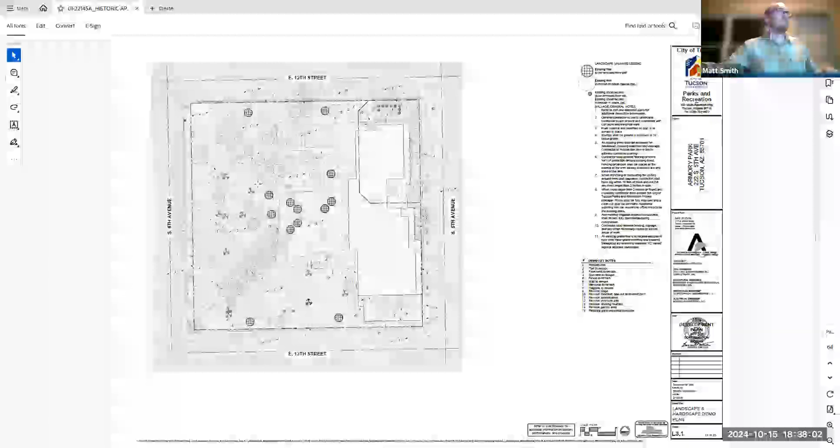This is Helen. Are you able to make your screen larger? Yep, that work? Thank you. I'll just pan around. Much better.

As far as the hardscape elements, we're proposing removing the existing shuffleboards, horseshoes, games court, removing the existing plaza space, and removing the existing stage with overhead structure. The drive entrances into the site with the vehicle barricades will be removed as well. Up in this area, we are working around the one saguaro that will remain, removing some of the curbs, some of the DG areas, and adding parking where budget allows.

Moving on to the plan, I'll start north and work down. In the footprint of the existing games area, we are proposing to add a dog park. The dog park works around an existing underground water line that needs access by Tucson Water. It's been a sticking point with this project, so we're proposing the gates all aligned along this water line. I'll go into the details of the fence and the gates further down.

Going to the center of the site, we are trying to bring back the historic character and context of the site, moving the stage back to the center, trying to realign some of the crossing paths and bring the focus to the center of the site.

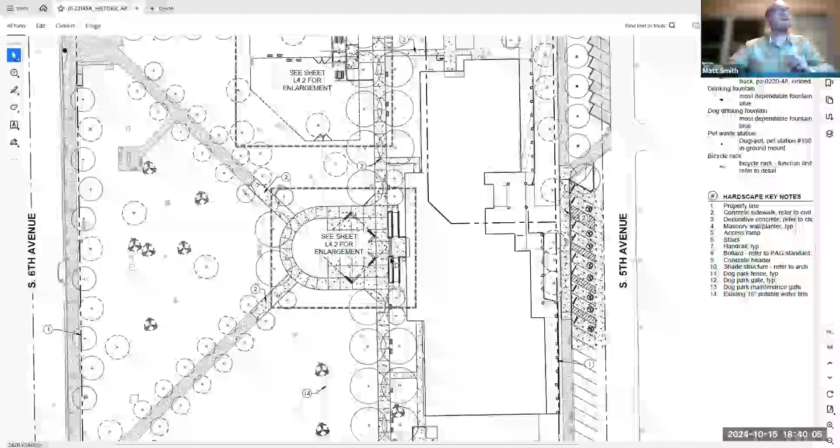Going towards the activity center, we are proposing some steps and ramps to get access into the back entry for the center, and that all aligns with a north-south sidewalk for circulation. That sidewalk would be lined with Chinese pistache, trying to mimic some of the historic ash trees along the perimeter of the site.

It appears that walkway has been moved maybe 10 or 12 feet to the west from the original proposal we saw in January. Is that to accommodate the new ramps? It may have been moved just a few feet, but it's more or less stayed in the same location.

Some of the constraints we're working around are the existing pole off the corner of the building, and then trying to align as best we can without removing many parking spaces.

So the idea is to limit vehicular circulation into the site. This north-south path is about 10 feet wide, so it will accommodate trucks and other access into the stage, but then would have a barricade to limit access at any other times.

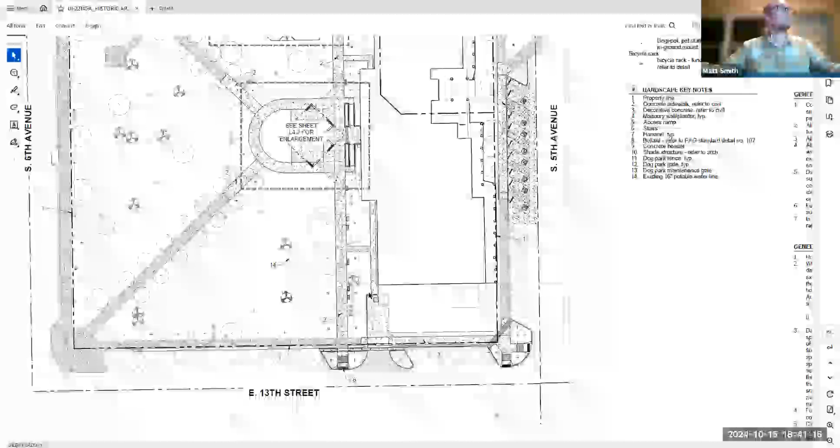Down where the existing dumpster is, we're proposing moving glass recycling, so all that is concentrated in one area. And then moving around the perimeter of the site, as I mentioned, we are proposing staff parking, and this will be only staff parking.

And then adding back trees to the perimeter of the site. Over here would be ironwoods around the staff parking, kind of mimicking the desert theme with the saguaros and palo verdes that are already here. And then around East 12th, 6th, and 13th, we would be putting back ash to mimic the historical ash.

So there's a couple questions to the board with these trees, particularly the cypress that blew down and the ash. Is that the path we should go back down? Is replacing the cypress with cypress, replacing the ash with ash, or is there a more long-term solution?

We have concerns with the emerald ash borer eventually getting all ash in Arizona, maybe in the 15 to 20 year time span, but we're looking for a 100 year time span. Are we better off putting oak or something else? Same with the cypress—are we trying to match what was there, or do we want to start bringing something back in?

Helen's probably best suited to address this, but I've got some comments too. Do you want to go first, Helen?

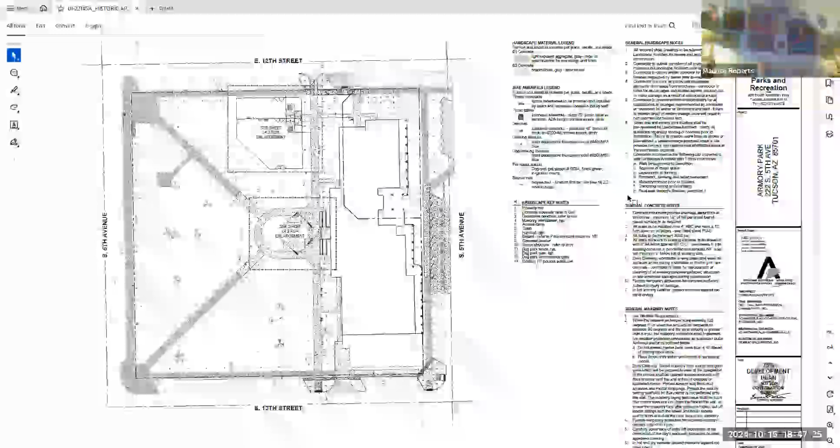I don't know if there, I must say, I don't honestly know, Matt, if there's a hybrid that has been developed at this time. We could ask Steve Grady, who probably has his finger on this more than anybody else.

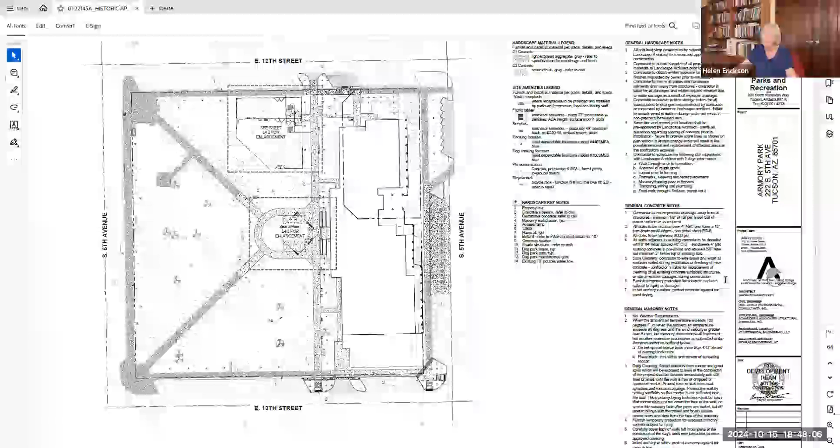Yeah, we can table this until the landscape subcommittee. Are you going there or just PRS? No, we're doing the landscape subcommittee as well. Okay, great. They can probably give you better guidance on that.

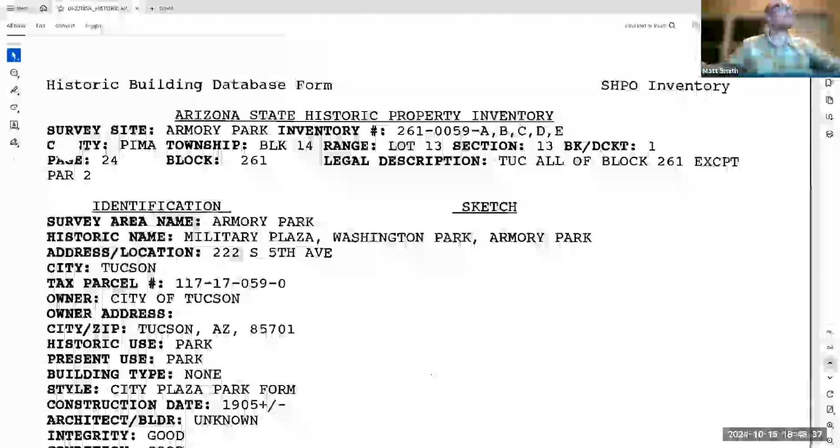Okay. But this looks largely like what you proposed before, tree-wise. Yeah. The neighborhood does have one special request all of a sudden that we didn't know about. We've had a lot of prominent people in the neighborhood pass away, and the collective action of the neighborhood suggested planting memorial trees, and that has morphed into...

Because a public tree would need to be in the right of way or our neighborhood park, if it would be possible to plant another pistache in the south quadrant or something and put a plaque on it that Armory Park neighborhood would take care of, that says Armory Park Neighborhood Memorial Tree.

John, wouldn't you encourage the neighborhood not to plant one tree, but to plant, say, a row of trees? That would be fine if I wanted to put that concept into the discussion now.

Are they requesting just trees? Or are they open to a bench or bricks? I'm just trying to give the city more options. There are a lot of plant people and there aren't many bench people in the neighborhood association, so that's a tough call.

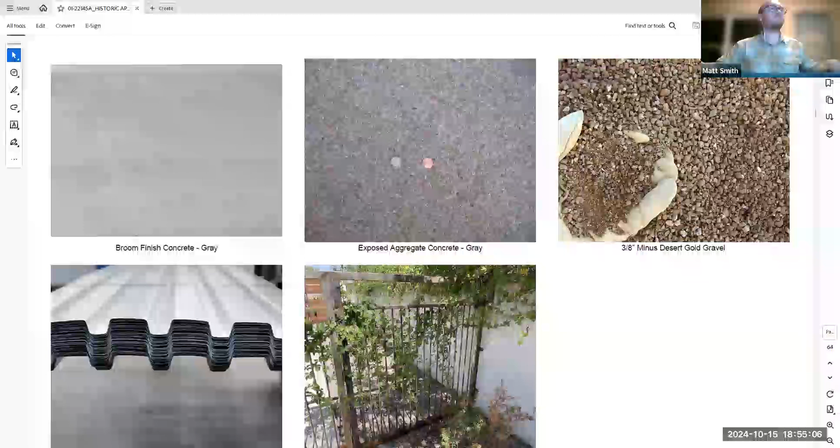Tree species: we have ash, ironwood, pistache, Palo Blanco, hackberry, and replacing the cypress.

How did you pick the Palo Blanco as a more decorative element? More decorative, more upright, and we've actually just got feedback from city transportation that they do not want it in the right of way. So these will be just around the building.

Do they have a reasonable lifespan? They do, but they can be frost sensitive—they freeze down around 25 degrees. But if they're right against the building on the western side, it should be a good microclimate for them.

Any other questions? After the whole presentation, there might be.

Okay, Michael, you're up. Alrighty, let me make sure I got it. Valerie, I can share—oh, okay. That's good because I don't have the ability to. Do I need to make you co-host, Michael? Yeah, please.

Good evening everybody, appreciate your time. So what we've been tasked with, as we mentioned and presented before, is the restroom renovation and the shade pavilion itself. We presented some options last time, and I think one of those was sort of preferred, so we've taken that and massaged it, and we have a new concept to present to you today. We'll get some feedback, and we can also show you what we're doing with the restroom—I know there were some concerns about that last time.

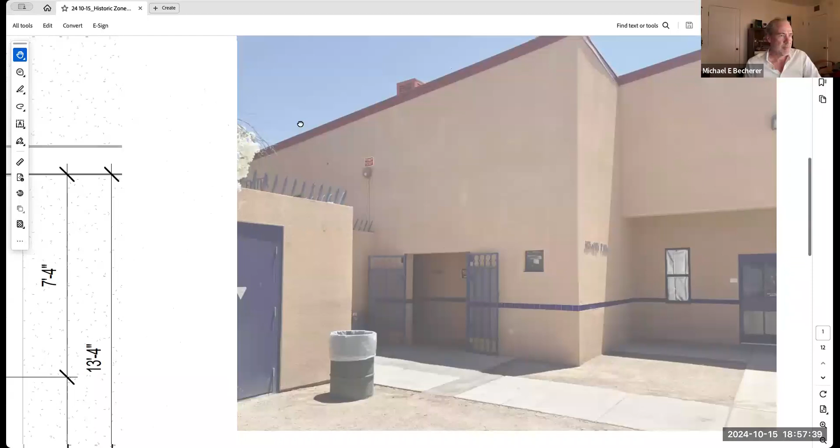It's a fairly straightforward scope of work, and we want to explain what we're doing. Probably the easiest drawing to understand this is these two little images that Valerie put together for us. Let me zoom in. Can everybody see my screen okay? Yes. Okay, so this is the existing condition.

So it is only the north restroom, and I'm assuming everybody knows where the restrooms are and their configuration. Is that correct, more or less? Yes. I've never used that one. I assume the restrooms inside will be still accessible. Yes, we will not be affecting the restrooms inside, and whatever the hours of operation are, we're not affecting any of that.

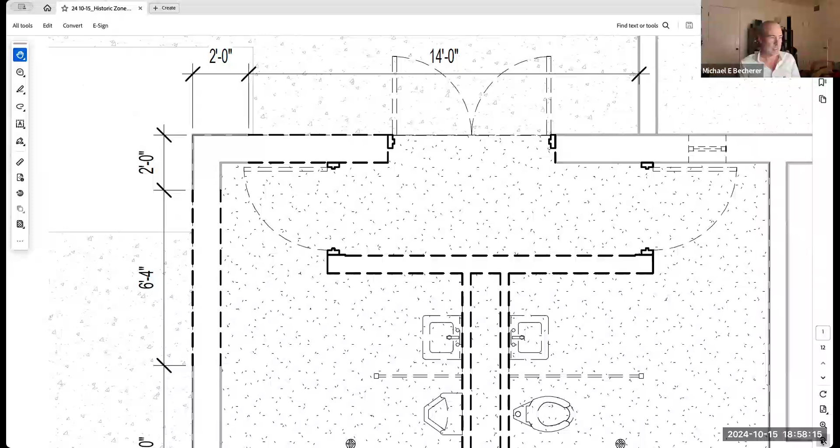It's only this exterior restroom on the north side of the building. Obviously, it's been very problematic. If I slide over here to our floor plan, this is the sort of existing floor plan. These are not accessible. They do not have an accessible stall. They do not have an accessible door.

In addition to that, I think we all know the fundamental issues that we have when these types of public parks, public restrooms are private like this - they do cause problems in terms of people using drugs and all sorts of things, barricading themselves inside the room.

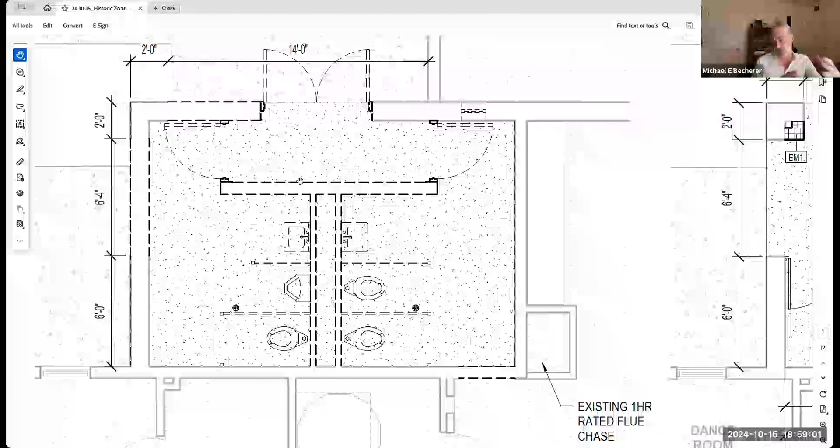So the parks has gone to a much more open model for the restrooms, and I understand your point, John - you would not use them - but we have to find a balance between visibility and public safety, and then privacy and having restrooms. That's kind of what we're trying to find, and that's why we want some feedback today in terms of what we're proposing to do here.

So let me slide back over to this image again. Today we have this door with a couple of gates on it. You go into those two restrooms. They have another door that you go through to get into the restrooms, and then there are the stall doors inside there. We're proposing to drastically simplify all of this to basically 2 stalls.

And this is similar to what we're doing with some other restrooms around the city as part of these parks projects. Now, obviously, they're not all historic resources, so there are different considerations for those other sites. But what we're looking at, what this ends up looking like is something closer to this image on the bottom.

We want to open up the doors quite a bit. You will see into the space. There will be 2 stalls, and we have not quite picked a color. The material for the stall partitions would be some kind of a metal, something durable. There would be visibility so that somebody could see if there are people in there, in terms of being able to see their feet. The police would be able to monitor the space.

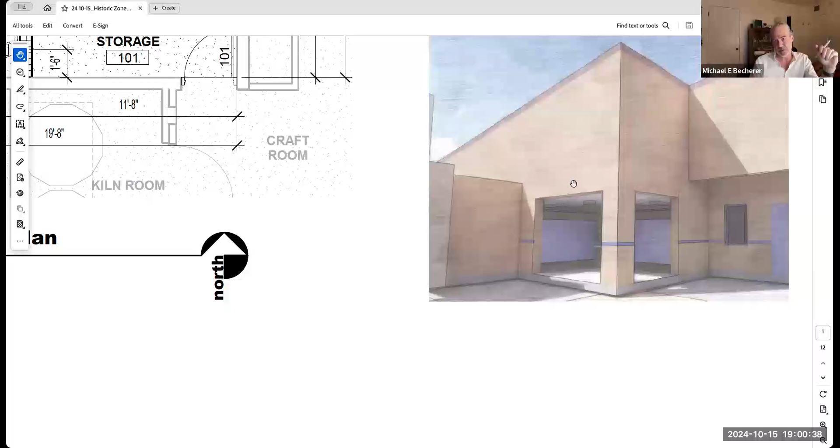And then a request on our 75% review was to consider the addition of some roll down shutters or gates, or some kind of way to lock this, because currently we're showing it as being open 24/7, which is the original direction we got. We are looking at some roll up gates that would sort of roll up into the ceiling cavity and disappear. We could also do something more like what's there now, have some swing gates on there, but those tend to get damaged. But certainly willing to talk about that.

If we look at the plan view of it, that's this drawing here. Let me slide back for a second to this. So this drawing is the existing conditions. We have the one gate that we're showing here where the 14 is, and then we have the 2 doors here and here that go into the men's and women's stalls. And then there are 2 fixtures on each side and 2 sinks.

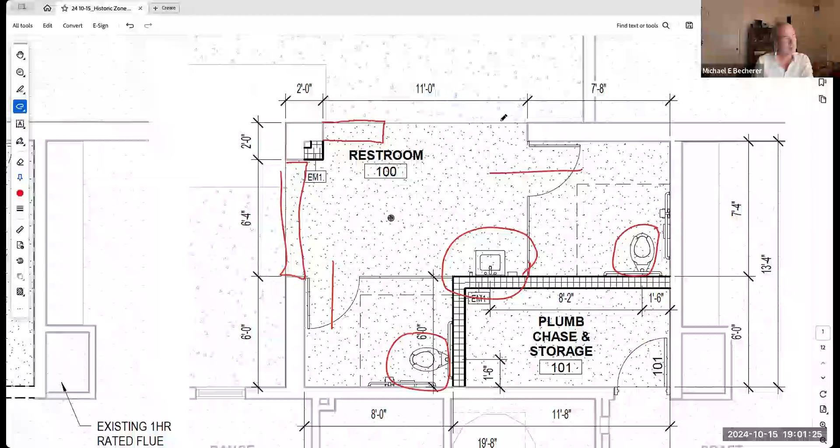We're going to reduce that to 2 fixtures, so there will be a toilet - basically 2 toilets within 2 stalls. And then there will be a common sink that will be sort of in the open area. The portion of the wall here - and basically, I'm going to sketch this in kind of here and here - would be removed so that we create a much more open and visible space from the street.

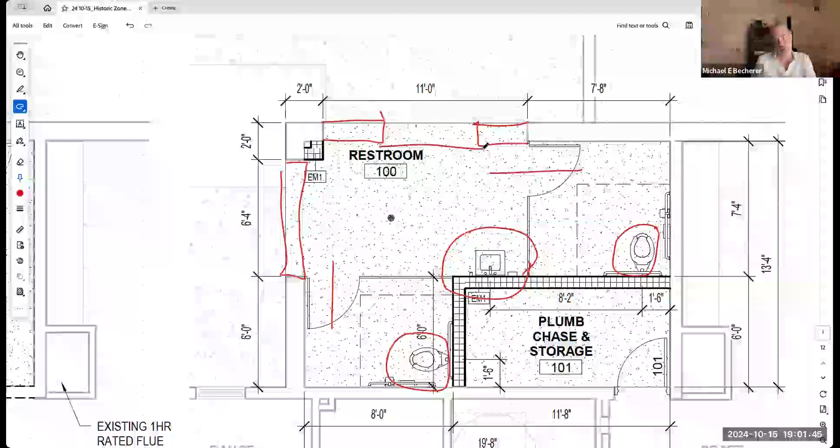And then, as I was saying, we could either include some kind of a gate system or a sort of roll down shutter that would come down from above to secure the space. We're still moving through that investigation. So, as far as the restroom, that's kind of where we are today.

And just to be as transparent as we can, we know there are public safety concerns with these facilities, but at the same time, we know families want safe restroom facilities they can use when they're visiting the park. So we're certainly open to comment. I'd like to do comments on this and then talk about the pavilion.

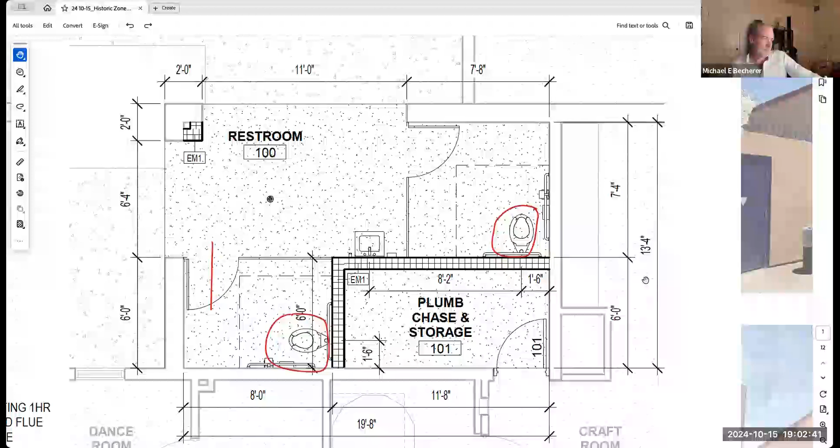I just wanted to say that the plans that were presented to us show a completely different configuration. Right, this has been updated. A central wall and 2 side stalls. Yes, we've updated this significantly. Sink in the center, 2 stalls off to the side, and the stall height appears to be such that you could stand on the toilet and hide. And the framing plans show it's a wood wall divider, but the illustration and elevations presented in our design package show it as concrete block.

So do we just give you guidance instead of approving it and let you do what you need to do? Or how do we handle that since it differs so much from the design package we have to review? We will send this to you. This is the current design proposal.

We've added this plumbing chase and storage room because we need this space for the plumbing fixtures and flush valves. All of the mechanical parts of the plumbing for these park structures are usually in some kind of chase so that they're protected. So that's why we created this chase and redesigned the restroom in the configuration you're seeing on screen now. So this is our current proposal, and this is the proposal we would like comment on tonight.

Okay, so what we need to comment on: the north door is moved, going from 14 feet down to 11. No, John, the board should be commenting on this plan. When they came to you the first time, that was a courtesy review, and they got comments and feedback from you. Based on that, they posted a design package that shows a completely different configuration, which we all studied prior to this meeting. So we can't approve it as presented in the package. We have to approve it as plans presented during the meeting, not the plans in the design package. Okay, that's what you're saying then? That's correct.

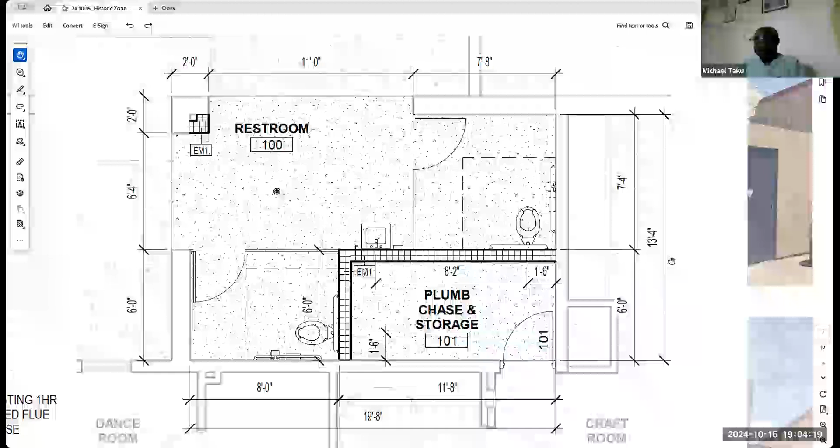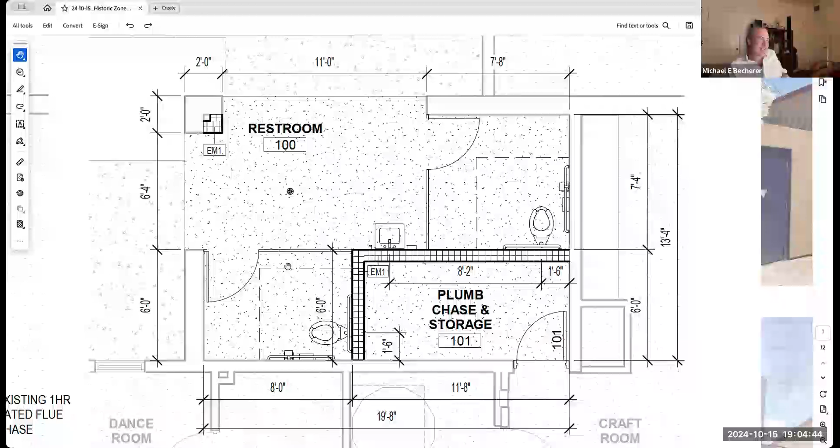And our purview is the exterior, so we are now looking at reduced exterior openings from those presented in the design package. I think it's now 6'4" and it was 8 feet in the package we saw. Yes, we have reduced that — I can explain if you'd like, or it's fine. Smaller is better in my mind, but we just have to note it because it differs from the package we reviewed.

So the request for the gates came as part of our 75% review with the city. If we do implement the gates, it's likely that this 11-foot dimension will also decrease to meet a standard rolling shutter dimension. So I'd like to mention that, but I'd like feedback on the gate — whether it's a swinging gate or a shutter, like an overhead shutter.

Hi, this is Helen. Yes — I think an overhead shutter makes a lot more sense in terms of lack of vandalism. It's probably easier to handle.

I have a question that's so off the chart I'm almost hesitant to add this, but one of the things I noticed — I was in Oaxaca, Mexico last week, and I noticed they've started putting the sinks and washing facilities outside rather than contained in the actual restroom. So I'm wondering, is that something that's been considered here? Would it make sense?

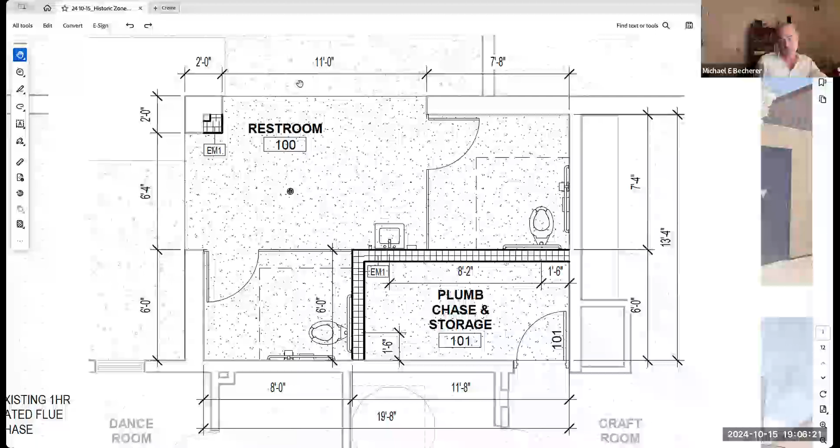So one issue with that, because of the way our plumbing code works here, is that you cannot have rainwater enter a sanitary drain. So if we were to place the sink outside, it would still have to be covered to prevent it from getting rainwater in it.

Helen, what would be the advantage, do you think, of moving this sink outside of the actual space of the restroom? Well, it seemed to be more a question that people could use the sink without actually going into the restroom. I'm really sorry I even brought this up. No, I mean, if we're trying to accommodate these safety concerns and also have minimum impact on the building, I think keeping everything within the footprint of the restroom makes some sense. But we're certainly open to other ideas.

I'm not discounting it. You're still going to have to hire Sani-lets for events because you've gone from 6 to 3 fixtures. Oh, we've got, yeah, essentially.

I have a question or comment. I think the rolling gates or closing gates are an absolute necessity, I agree with Helen. I prefer the gates that roll down. I live a block away from Santa Rita Park and I can see someone turning that water on, running all night long, and I can see people camping out there, which is why I really feel that needs to be secured.

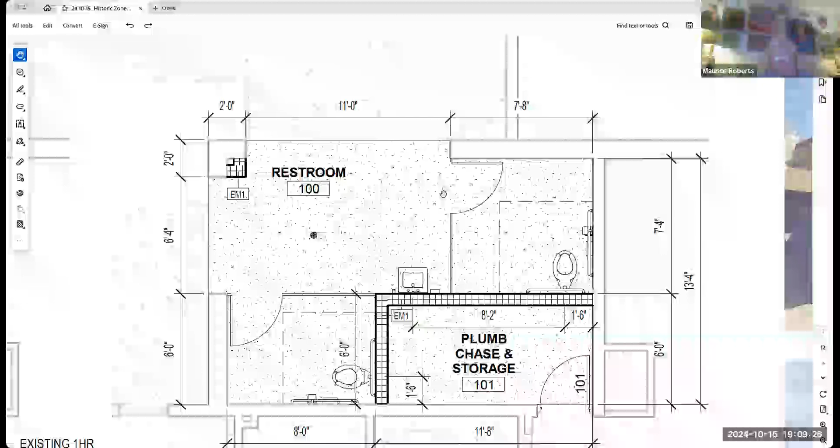Sorry to hang you up. I do have a question. I concur with the rolling gates, I think this is a good idea. On the inside of the building is even a better idea. I do have some concern about the reduced number of stalls. We're going from 4 stalls with 2 wash sinks down to 2 stalls. I've seen the park with crowds big enough that with the existing bathrooms there's a line to get to the bathrooms. Now you're cutting it down by 50%. I don't know that this is really the way to go here.

Well, there's obviously enough room for stalls, even if you have an open concept to make it more safety friendly. But it seems to me that cutting down the number of stalls by 50% is not the way to go here. Again, like I said, I've seen crowds at times with kids and full whole families waiting in line. I can see that double up, because there's only 50% of the original number of stalls.

So I don't know that's the way to go. I would just suggest that on day-to-day use, 2 stalls would be more than adequate. When there are events, I would agree with you, 2 stalls is not adequate, but neither is 4, frankly. What should happen, and does happen, is that the event organizer would bring in porta-johns or whatever it takes to accommodate that specific event. So if we have 500 or 1,000 people there, that's a very different situation than a typical Tuesday afternoon in the park. But your comments, we will certainly take back to the city and have a further conversation about the number of fixtures.

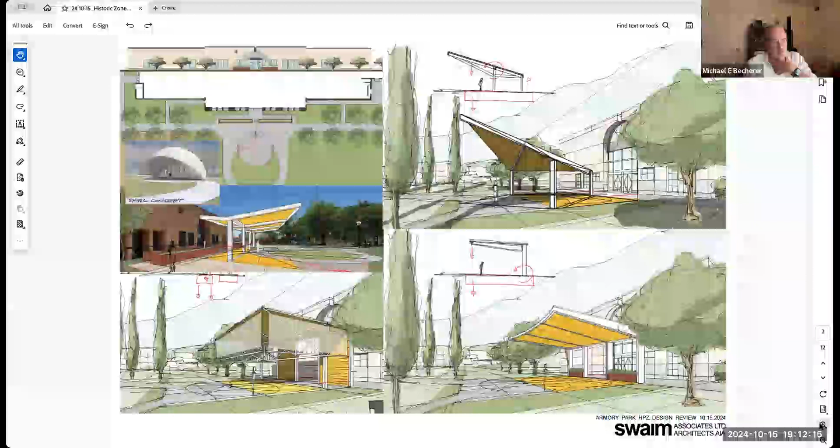Okay, onwards and upwards. All right, so we did present the pavilion before, so let's show you where we're at. We'll pop over here, this is just a little sheet of what we showed last time. I know, Helen, you were not part of that meeting, I believe you missed that meeting. So we showed basically 4 concepts, I'll zoom in on these and do just 30 seconds on each. I don't want to go through these again, and then we will show you what we're proposing today, and we want feedback on this because we're actively still designing this space. I think it's a very important space for the park and the neighborhood.

So we are taking this very seriously. We had a couple of schemes. We had sort of a shell concept. We talked to some fabricators of these kinds of dome structures, and this is simply not affordable within the money that was put into this budget in the bond. So we've moved away from this kind of shell dome concept.

Did that get a plans review? Because we didn't see that. We saw the other 3. Correct, you never saw the shell. You are correct, this came in after that. Okay, but it's on the table anyway. It's off the table anyway. It's very cool, it could be a very cool thing. Yeah, it's just not affordable.

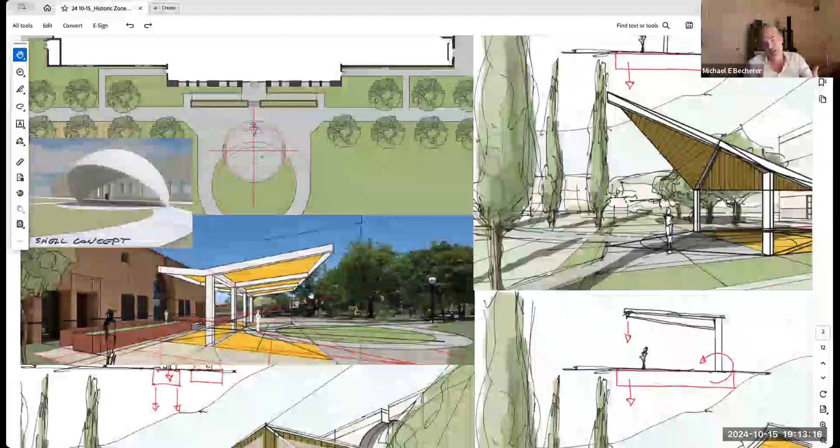I know, well, I did this coming out of our meeting. I just remember there was a lot of discussion about that form, and we've come up with a kind of hybrid, I think. And I just want to get some feedback. I'll walk through what we're doing and explain why I think it's starting to pull these pieces together, but obviously we want feedback on that.

We had more of this, sort of a double cantilever shade structure as another option. This, I know in the meeting with you, was felt this was maybe a little too either like gas station awning or just maybe a little too mid-century. This was an idea about having more of a tectonic structure.

So a very sort of like some trusses with a cantilever. There would be some screens that could hang down. This might be a reflective material. We talked about this could almost start to mirror the surrounding environment and maybe disappear a little bit. So this was more of a concept that was trying to make the pavilion do several things and also play with its materiality from an architectural standpoint.

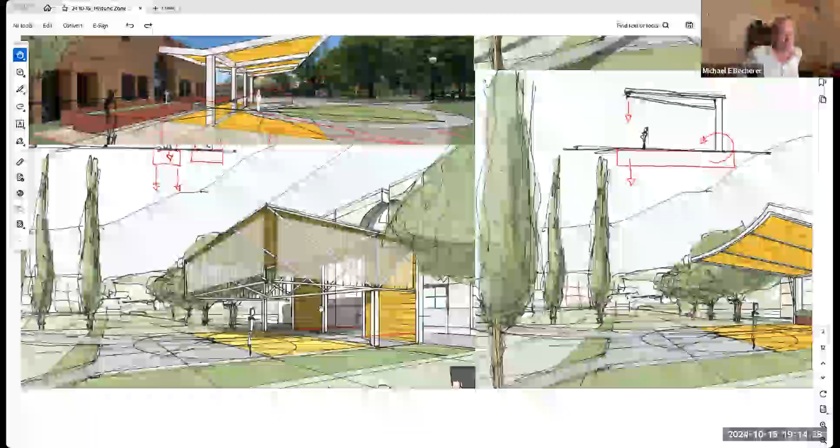So this was a little more complex from a design standpoint, and I think generally everybody felt this was just too busy for what we're trying to accomplish here. And then this was another variation on the gas station canopy. I think there was a general agreement this would probably be acceptable, but it's not terribly exciting or necessarily fits within the park and the geometry of the park that well.

So we also showed this idea, which was this idea of a tent, because we were looking at the historic photos, looking at how this was a military camp at times, but then also trying to find a way that this thing could really lift up and open up in a similar way that the original band shell did.

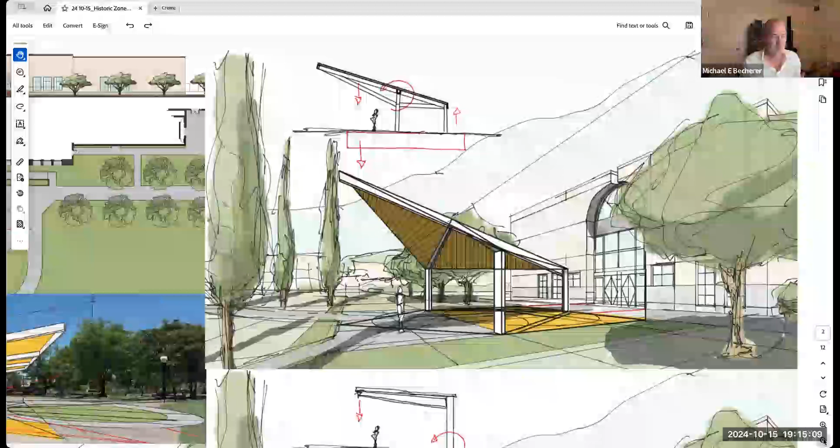So Valerie did a fantastic job and found some more photographs that we can show. So this is just a modern photograph. There's the existing sort of bandstand that's there. We all know this. It's basically from about 1975 is what we understand when this was actually implemented.

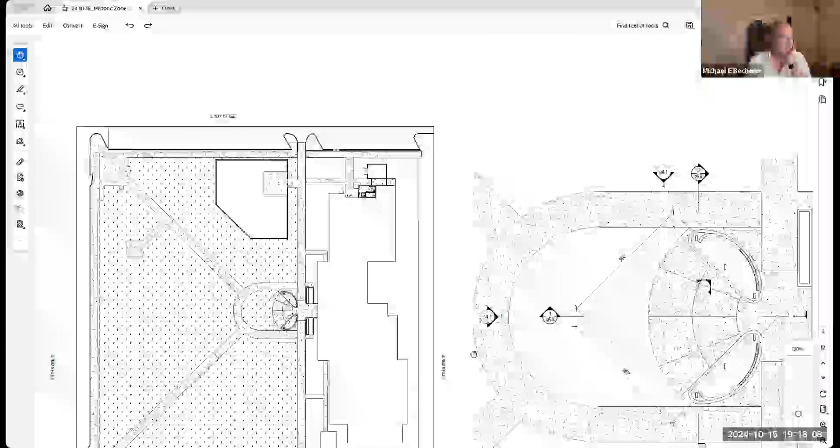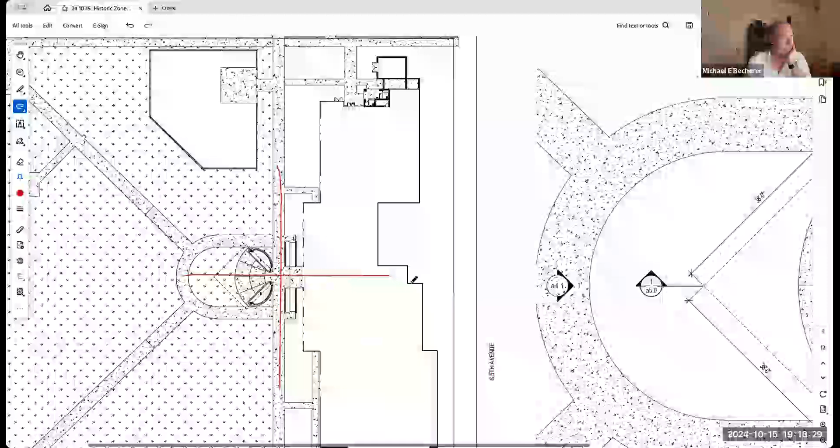So this is the plan right now. The structure sits in the center of the park, as Matt described. We're maintaining the central access through to the building, so we're not limiting that connection, and we're also allowing pedestrian traffic to move behind. You can see the dashed line here—that's the limit of the actual roof shade portion of this structure.

We'd have a series of columns—3 on either side that come down to support it. What that does for us is make this entire space column-free. So if we have a performance or a speaker, the audience would be out here and able to have an unobstructed view of what was happening.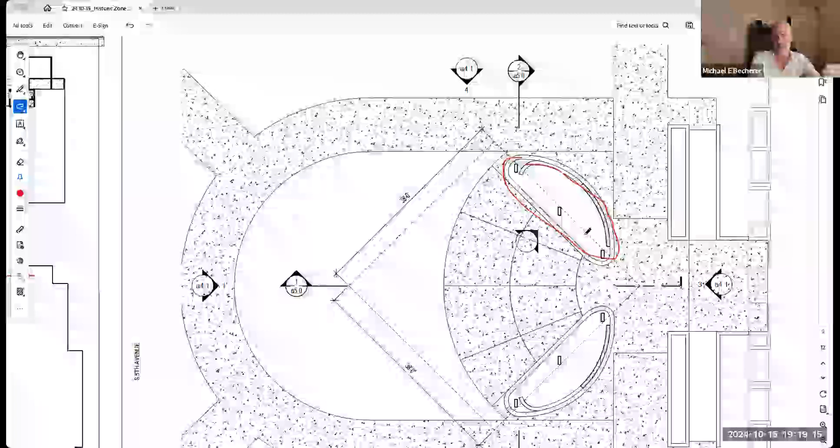In addition, we're creating two planters integrated with the hardscape to create a kind of backdrop and background, and to really help ground this structure in the space. We didn't have that before—it was just two columns, and it looked like it was on toothpicks. It just didn't look balanced, it looked wrong. So we began investigating that form a little more to understand it.

I think Valerie and I are both still working on the shape of these planters. This is a variation—we've been through square things, round things, and curvy things, and we're still actively trying to find the right form. I'd like to get some feedback on that.

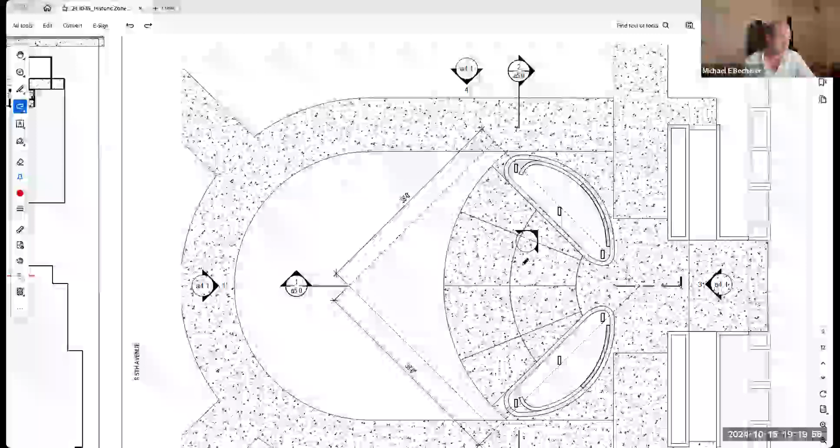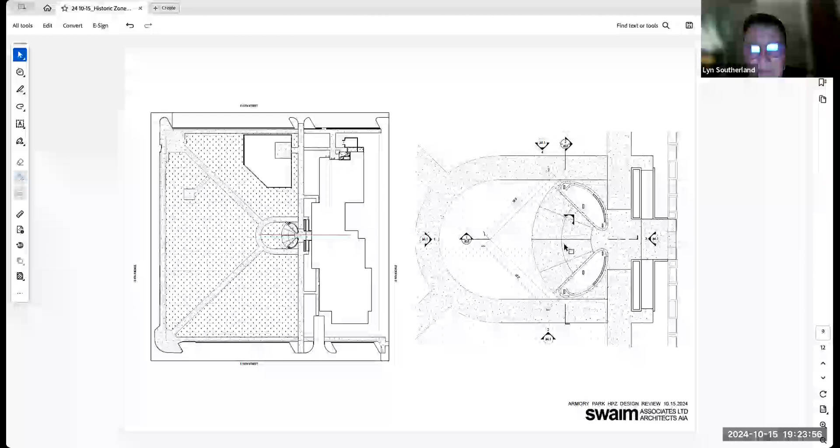You don't think so? No. I mean, it's 40 feet wide, I think. Is that right, Valerie? Yeah, the whole canopy is 38 by 38. But that is not all stage, is it?

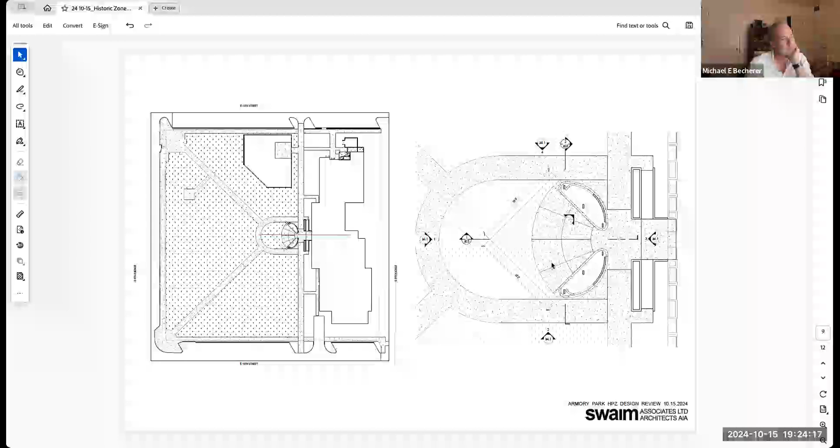Is there not some differentiation between concrete and the rest? Yes, there is—hang on, I'll tell you approximately how big the stage actually is. The stage itself, this concrete area in the center, is about 700 square feet for where the stage actually is. It's going to be about 40 feet wide at the opening, tapering down to probably the 15, 12 foot range at the opening to get to the door to the senior center.

It's going to be too small. Okay.

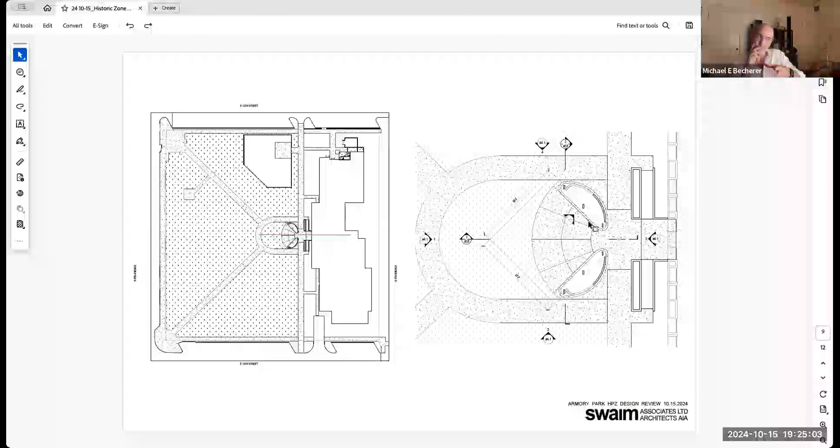I will say, Maurice, this thing has grown and shrunk in size a few times. I do like the new design you came up with—this is pretty. But the fact is, there's a whole bunch of...

There we go—is somebody talking? Yeah, Maurice, can you say that again? We had a little crosstalk.

So I was saying, I like the new design—it's much nicer than the first versions you gave us, but it's too small. I love those planters, they're very pretty, but this is stage space you're talking over here.

As is, we're not showing any elevation on the stage, which is unusual. Usually a stage will be a couple feet above the ground at least, to make it special. So you're taking that away—all right, fine. But now you're cutting down the actual stage space too much. Like I said, we have those mariachi festivals on a regular basis, they come with dancers and everything else, and they're not going to fit.

So what we can do, Maurice, is some research on the size of those performances and see where we are with that. Your point's well taken—it was larger at one point, and we shrunk it so it felt more in scale with the park. For smaller performances, like a band or a jazz quartet, it would be fine. But you're right, large performances with a mariachi may not fit as well in this space. We'll do a little research on that.

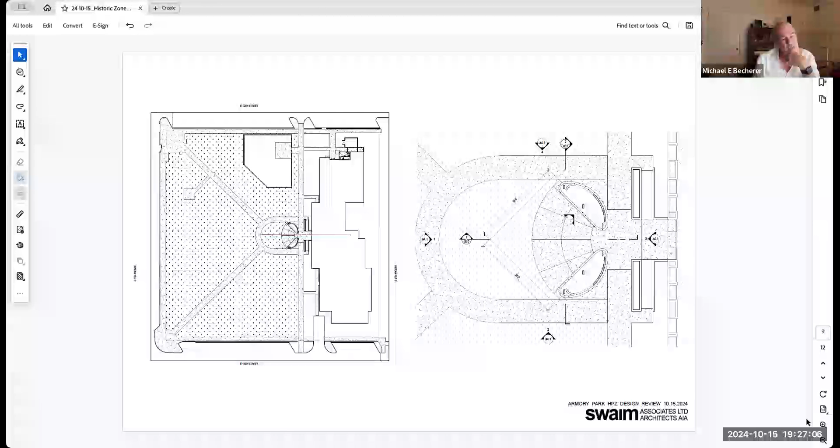You could change the pattern so it's a larger ovoid that had smaller ovoids or kidneys within it. Yeah, we could push that line out, and what you're saying is maybe pull these back to the column line at least, and that would open up some space. Yeah, there's all sorts of different tweaks.

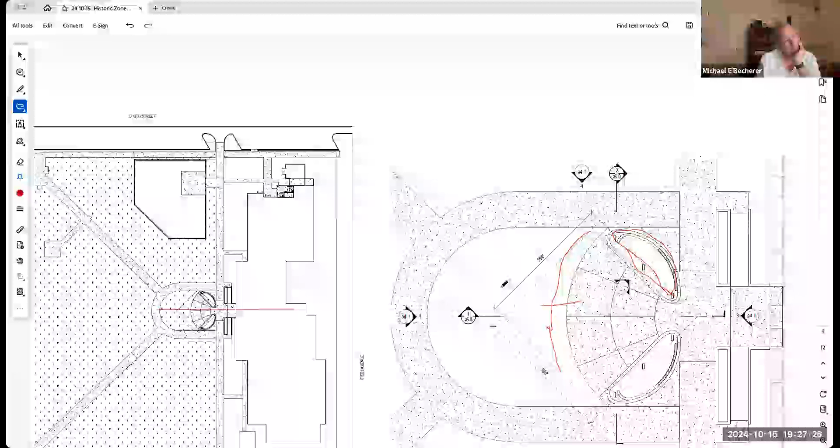I want to open this up to the board. My question is now about process, because the bathrooms are in flux, the canopy's in flux. Do we do another courtesy review? Do we approve the things we agree on tonight and leave stuff for a future review? How do you want us to do that? Because this has nothing to do with the design package we saw, or thought we were reviewing. And I'm glad, because it is much better.

So Mike, next time what will happen is when you send a package to us, if internally you've made significant changes, please just send it to us so we can share with the board, because I think the time is too short for the board to review this now, unless they're very comfortable making a decision on it. In full transparency and honesty, we didn't finish these till about 5:30 today. Good for you, it looks so much better. Yeah, no, I agree.

I was having the same problem, John. It did not feel right. The one comment I was going to make about the old plans is it would have looked better if, instead of the columns supporting the roof right on the edge, the roof swept out a little farther than the posts, because they just look like bare concrete block. There is a prohibition on exposed concrete block, but if you use a decorative artful masonry device, or planters, cedars, so it doesn't look like mid-century modern grid patterns, there's a lot of different options here. So I'm glad it's more in flux, because I wasn't super happy.

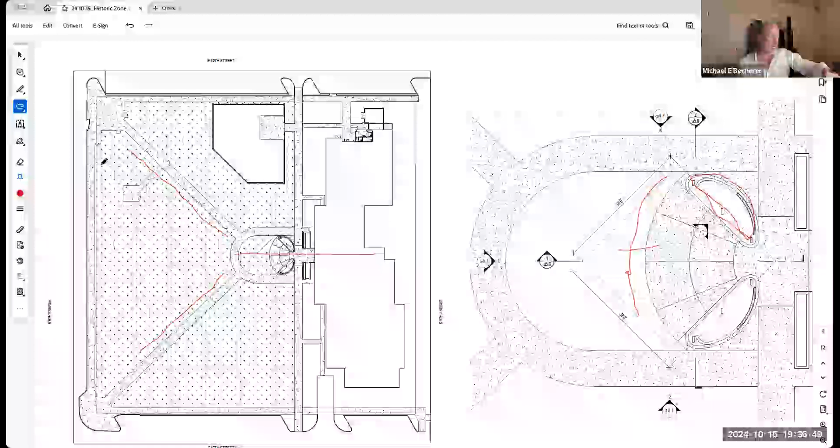I think we're trying to stretch that tip out to help mitigate some of that, to get as much shade on the performers as we can. And don't forget, we do have landscaping — we are going to be replanting those tree lines coming down both sides of the walk and also across 5th Avenue. I think when these mature, then at least the last hour of daylight, or at least 45 minutes, it will get behind the tree line.

I'm not making that an issue in terms of where you're going to orient it — I think it's oriented the way it should be. I'm not arguing that point, I'm just saying it's unfortunate that we have a west exposure. I agree.

The other thing I've noticed, maybe I'm seeing the site plan wrong, but when you showed the site plan, you showed two trees. It looked like new trees directly out in front. I would think that would have a tendency to block any views of people sitting out beyond that. I don't know how it's going to affect it, but my sense is it may be better to leave those trees out to get more visual exposure to the stage.

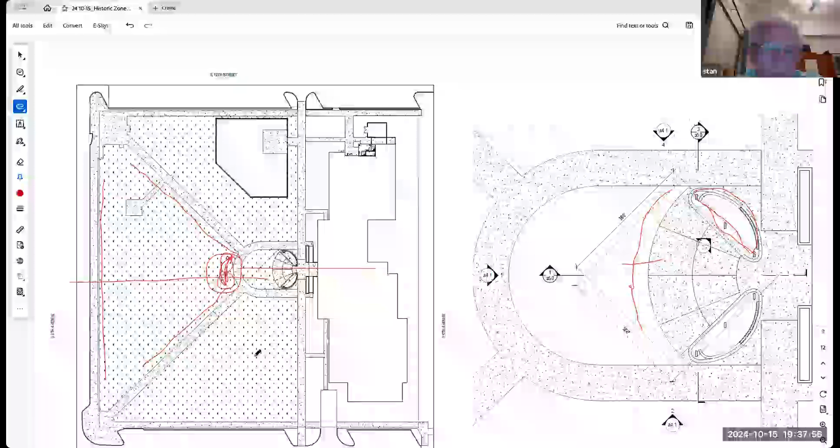You're saying right here, this area? Yeah, there were two trees shown there, and from a functional standpoint of how this band shell or whatever you want to call it is being used — visually, I would think that would be blocking anybody sitting out on that west section from looking directly into the stage. Maybe I'm wrong there, I don't know, but it just seems like it's a visual blockage.

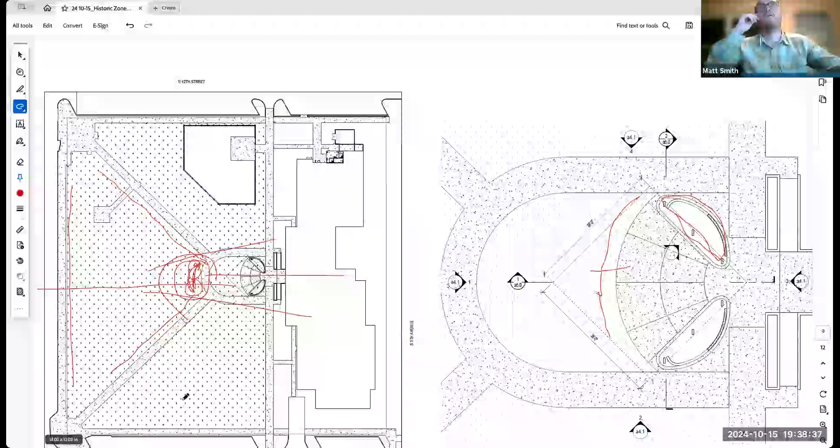Unless you can show me or convince me those are necessary because they may be providing some shade eventually. That's what we were trying to go for, with that western exposure, just putting something there to block it. And they're pistache trees that are going to get tall pretty quick, so hopefully they'll have a clear trunk on them — not too much of a view blockage.

Well, if they've got good views from under the tree line, the leaf line or branches, maybe it's okay when it's mature, but it seems like it's a blockage right now to me.

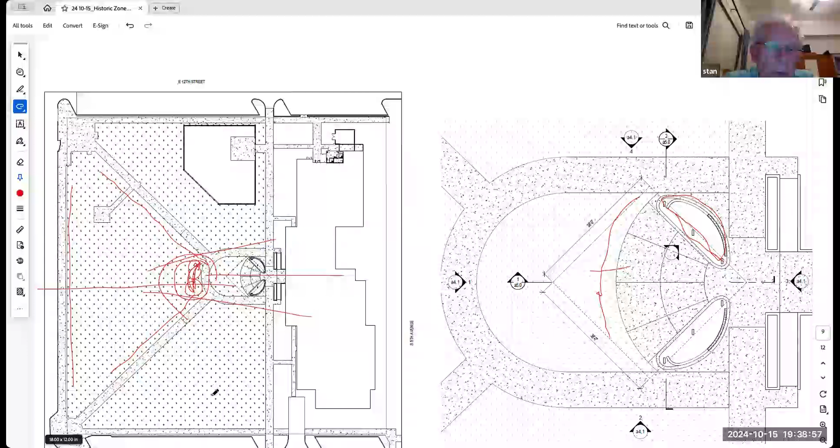There's one more thing I remarked — the lawn in front of the stage. If you look at the existing stage, it's at the south side of the property, but if you go from the stage all the way to the north, it's all dirt or some kind of paving. That makes sense because a lot of those venues, when events happen, the senior center takes chairs and tables out, and you don't want to put these on a lawn — you want something hard, otherwise it kills the lawn.

So it's another issue going on here — your lawn is not going to last very long, if any. It will if it's maintained. We were thinking it would be a lot more pleasant to sit on a lawn than on concrete. Well, it's true when you're younger, but not everybody young sits over there — a lot of folks sit on tables and chairs. Sure, and like I said, this is not going to work too good on a lawn.

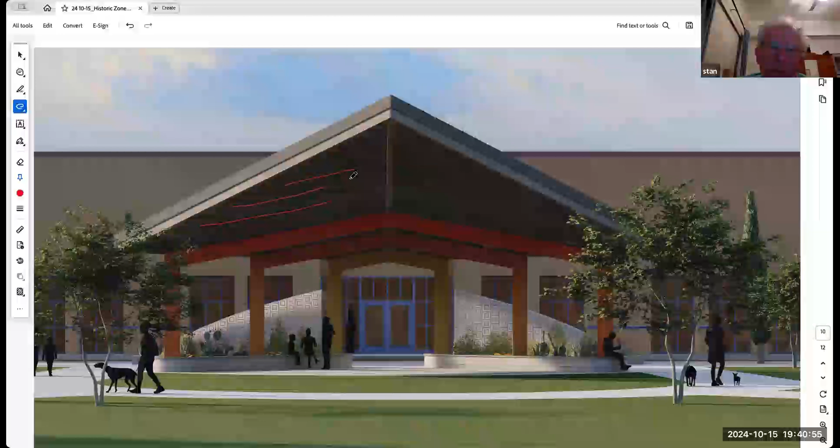I have one other comment — there's no implication of any lighting suspended from the structure. Is there intention of actually providing lighting for the stage during performances? Yes, we'll have lighting in this structure. We're considering something concealed within the space of the joists, so you don't see the fixture necessarily, but it lights a bit of the structure and the surface below. We'll also have power out here, so if they want to set up lighting towers for actual performances, they'll have the infrastructure to add that. We won't have permanent performance lighting though, just because of the cost and because those are very delicate instruments.

And a touch on lighting for the park — all the lighting currently at the courts will be removed, since that's not in the historic context. Any of the other globe lights will be relamped for LED.

Any of the floodlights that have been added will be removed. And we are proposing adding some lights in between the cypress and the dog park.

I'm sorry, Helen's been trying to speak for a little bit. She's next. Okay, so first of all, I think using this geometry is incredibly good because it

It reinforces the geometry of the park. We supported the idea of the centrality of this feature, again because of the geometry of the park. I think that is really good. I think your decision to create base columns here with planters is also extremely good because

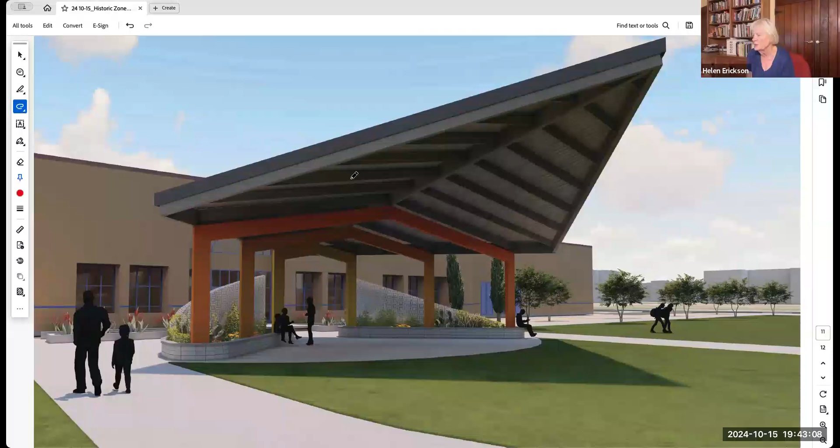So one of the questions I wanted to ask is about acoustic character, with a shell like this, have you looked into what impact this design would have on the actual acoustic character for performance, or just in the park? So generally the shape would support projecting some acoustic sound out from the structure, because

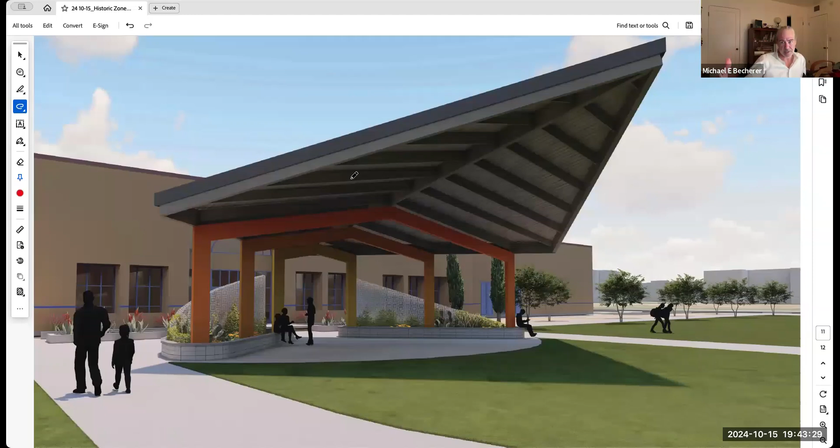you'll get basically reflected sound that will then come back down to the audience. It's not going to project it very far out into the space, but it's also a relatively small space if you are doing an acoustic performance. If this were a larger event, they would have amplification, and then the acoustics of the band shell really don't matter anymore at that point.

So that was why I was wondering about the panels behind. If they are perforated, what impact would that have? Oh, these panels? Yeah, exactly. I think they help, I think they help.

One of the things about acoustics with some of these spaces, you want to diffuse the sound as well. So if sound is traveling backwards and reflecting, you want that to come back diffused, hitting a more irregular surface. If we had some material here with a pattern, or more like a breeze block with holes through it, that would probably help diffuse that reflection from behind the performers, and we would get a more pure reflection off the actual structure of the canopy itself. That would probably help the performance.

Does that make sense? Yeah. No, I think the design is excellent. I think the shape of the planters is excellent. I think the idea of the curve in front of it that reflects on the ground, the idea of the original acoustic shell, I think this is very good.

I like the looks of it. I understand everything that you're saying. I actually feel that sharp angle is, for me, a bit aggressive or non-organic, to use a trendy term. But I understand if it's structural and cannot be changed, then that's the way it is.

I like the curves that are there, and I would like to see more of them. Otherwise, I understand everything. I think that your planters need to be well established to keep them from becoming little junkyards. And I do agree with Helen that the fact that the concrete part flows directly into the turf does make it easier for larger productions to expand into the community and to the audience. And that's all I got to say.

Thank you, Lyn. I want to address the elevated stage quickly, because I know Maurice brought it up as well. So the city requested that we not elevate the stage. One of the issues with elevating the stage is then we also have to provide accessible access to get on top of the stage, which takes us back to the existing band shell with stairs and ramps, and the whole thing spreads out as a much larger construction the minute we elevated it.

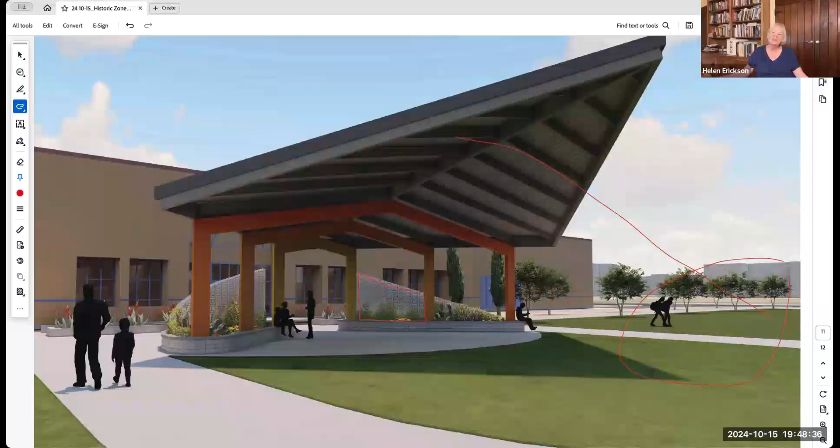As far as I know, it is part of the district. I do not believe at this point it has an individual listing. Okay, I'm looking it up right now, so give me just a second. An application was made, but I don't know if it's been accepted by the National Park Service.

So there is an application pending, is that right? Steve Grady put together a package and approached SHPO about it, which was supposed to be forwarded, but that process, because of staffing and changes and other things, is kind of not dead in the water, but sitting there. But there is an application made. The study has been made to make the application to the National Park Service.

Okay, but it's not on the National Register as an individual listing. Right, but if there's something, it is a contributor to a district. It's not individually listed yet. It is a contributor. If there's something in process, then I think we need to take that into consideration, because this will be the largest architectural statement in the park.

And it'll be a dominant structure. I just would like to know the status of that other nomination and how it was put together, and whether the city is going to continue to back that, or whether they're going to back off of it for something else. The other thing I'm concerned about, which you mentioned, is the western exposure.

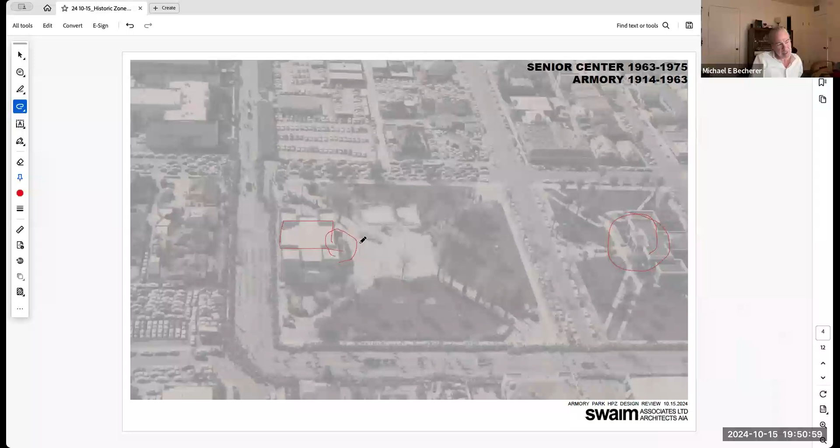Okay, well then I stand corrected. I think that I would just be concerned with the status of that register nomination and how that impacts this project.

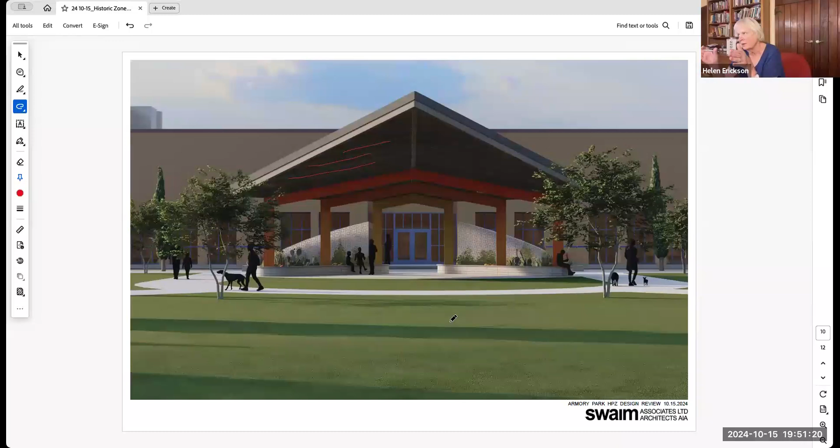Okay, can I actually try to clarify that? Because here is what happened. Steve Grady prepared this nomination at the time, which was like 15 years ago. People were not really understanding that parks were an important part of the National Register system. That has changed, and at this point that needs to be resubmitted. Actually, I have been badgering Steve to take care of that, and I will continue to.

And the other thing too, Mr. Chair, I may want to add is we should be reviewing this on the current status of the park, not waiting. We cannot be reviewing this in anticipation. The park will be renovated before the National Register lists the park. I am well aware of that.

Well, I think you want to get some understanding from the state is that, you know, would this structure preclude its being listed? I doubt that, and we're also in a tough situation because SHPO has always deferred to the HPO, which we don't have.

But in my mind, it is at least in some ways a classically defined form in a classically defined orientation, even though it is a modern form that could be considered compatible because of its time, that it was built with the classical structure of the park. Also,

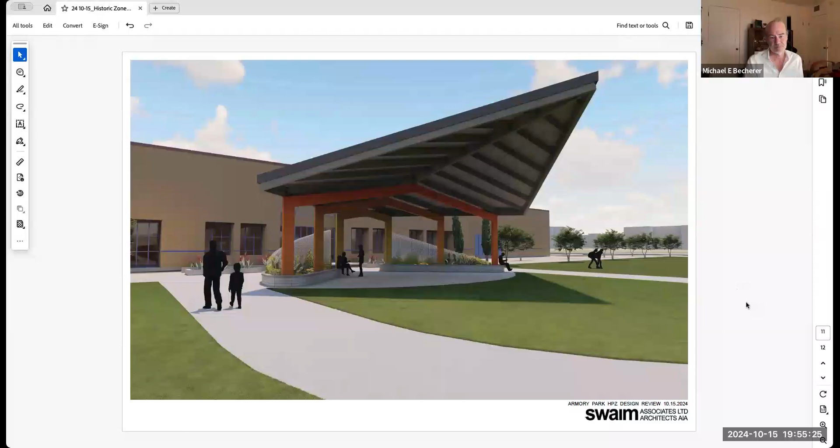Let's address the dog park and quick questions on lighting and parking so that we can at least approve things you'll probably need to start moving forward with, and leave the fun design elements to a later time. Does that sound reasonable? Sounds good. Okay.

Let's see that dog park, because it's way different than we saw in January. So I touched on it quickly, but the main reason for the change was this water line running through, right through the center where the gates line up. Tucson Water informed us that's a 16-inch main transmission line installed sometime in the 40s, and we need to do our best not to hit it. So gates are there for access, and the reorientation of the park is because of that water line.

This is more or less in the footprint of the existing courts. It expands slightly down to the south towards the stage, but more or less the square footage the courts take up is what the dog park is right now.

What square footage is it? Because it's not called out in the plans. I don't have it handy right now, but I can send that to you. Like a general ballpark, because in my mind it looks like the size of everybody's front yard in the neighborhood. It is, it's undersized for a dog park. I want to say the small dog park is about 2,500 square feet, and the larger is about 5,000 square feet, where typically dog parks are in the acre range.

So this is more of a relief area than a formal dog park, more for apartment dwellers with no outside space than people who have yards larger than this. Correct. And the idea is we've always had the question of whether it's large enough to be functionally useful. It's functionally useful as more of a relief area. As far as dogs running around, dogs can run in this, but the larger running area is going to be down at Santa Rita Park or over at Iron Horse.

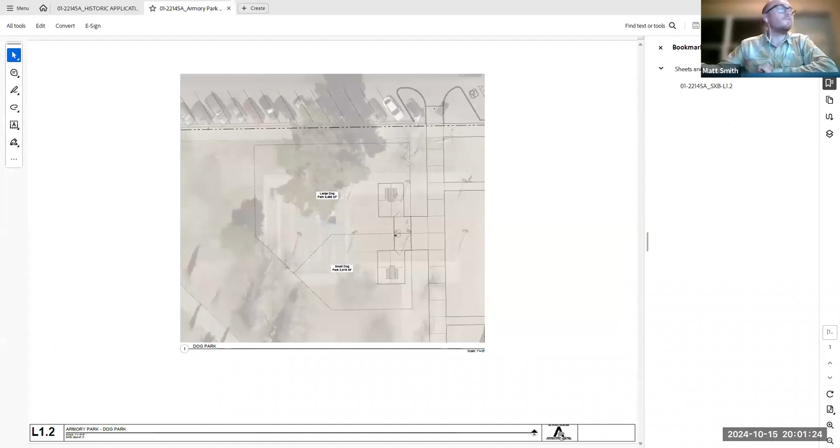Okay, what do they do when they get to the dog park? Do they go running with other dogs? And in order to do that, do they need the space to do it? And if that is the case, is that enough space for your dogs to run in that little park there, which, by the way, is taking almost a quarter of the available space of Armory Park?

Well, I think the real conversation is if I had the ability to take my dogs to a larger dog park, I would. But most of the community for these dog parks is going to be apartments, smaller condos. So if I was in that situation, I would probably have a smaller dog. Or even if I had the size of dog I do, I would want a space where they could at least run around or relieve themselves.

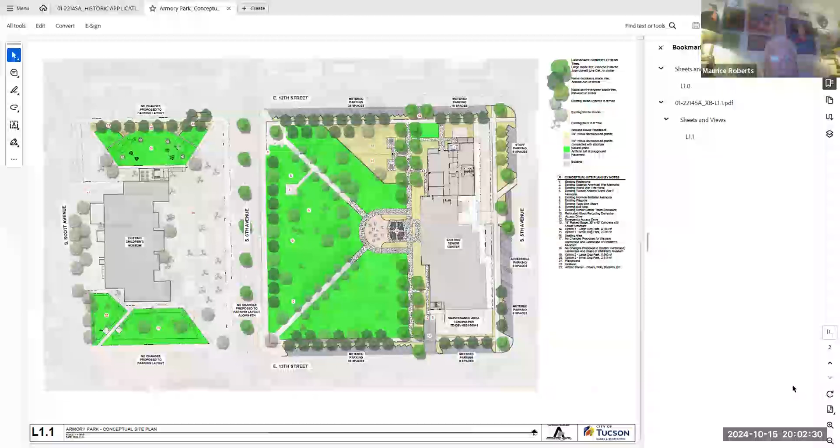Okay, so you just said that you want to make a compromise to be amenable to the apartment dwellers. I could see that. Did you ever think about putting up plastic bag stations like you see in normal parks, so that dog owners can take care of their dogs? But basically, a dog park is a place where your dog goes to run with other dogs. This is not sufficient for your dogs to do that.

This is too small. Even though Helen says that as it is, it's too big and it takes over the stage space, and she's right. Armory Park is not that big of a place.

If you want to do something for the apartment dwellers, then use the money you were going to use for that, and put some stations all over the park where they get free plastic bag deliveries, so they could take care of the dogs' poops and let the dogs go around. That's the whole point of bringing a dog to a park, is to let it run. And over here, you don't have the space for it.

And those are valid thoughts and concerns, all ones that we have approached the city with, and we have looked at not having a fenced area. I guess I'll stop calling it a dog park, and just have relief posts with dog bags and trash cans throughout the park, or pieces of agility equipment, so it's an on-leash dog park without any fences. But ultimately, with both the Ward 6 and community feedback, they've wanted a fenced area where they can have the dogs contained and feel safe.

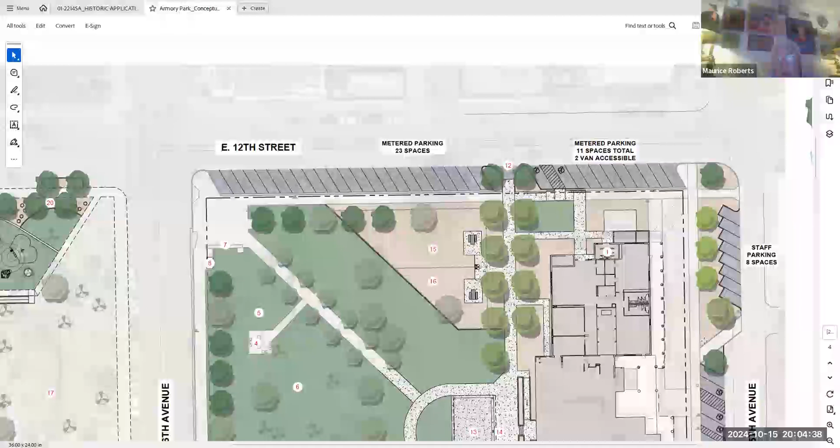This is not big enough for my dogs to run at, that is for sure. It belongs in Santa Rita Park, not Armory Park. I just feel Armory Park should be for the people, not for the puppies. And I love dogs, so that's hard for me to say, but that's what I feel.

I do want to caution the board: we are only one group of stakeholders in this conversation. So we kind of have to comment on what's being presented, but it's fine to have a collective idea that it seems pointless to put a dog park in this park. But that doesn't negate the work that the team has done in trying to develop a thoughtful area to place it and scale it.

And the fences look better, but I'm certainly not negating that I don't like the fences. We were preferring temporary things that could be for weekends or other things the last time we discussed this. They are less intrusive than the fences that were shown in January.

I think black is a little harsh to paint all the metalwork in the park. When looking at colors, I looked at the park bench manufacturer site, and champagne is kind of neutral, though it might fade out. The upper part of some of the light fixtures should be silver, not black everywhere, since really dark elements are a visual barrier as well.

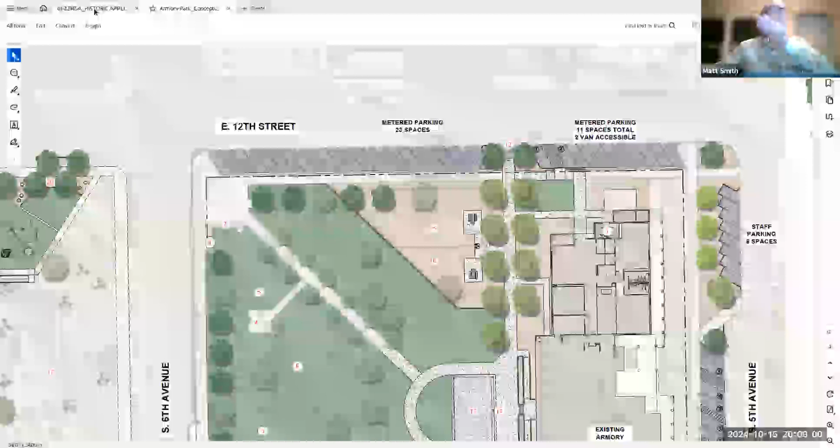We've just lopped off these triangular bits - this was the city's concern about dogs getting caught in these corners. So if anything, we've made the dog park smaller than what we presented in January, but we haven't encroached any further south, or this distance here isn't any different because this stage area shrunk a little bit, but we're still maintaining that sight line. But the whole idea of a dog park is to be able to free your dogs so they can run around with other dogs.

So the smaller you make it, the less viable it becomes. We can argue till we're blue in the face. The question is political, and it may be out of our hands, and we need to deal with that.

To add a little levity to all this, what if we just call it a dog relief area instead of dog park? It would be more appropriate. You are at least keeping the turf there and going to try to maintain it, correct? Correct, yep, because that's exactly what I want to sit next to when I go see something at the park - a doggy relief area.

I mean, it's a good point. I'm sorry, people at dog parks do not pick up after their dogs - that's one reason why they go there. Excuse my French, they're little shitholes.

I think one of the problems is Armory Park functions as the effective city park for all of Tucson to come to, and it has always been defined as a people space, and to cut out a chunk might not be the best location - the TEP lot, or even where the Children's Museum Park, or somewhere else might be a better place.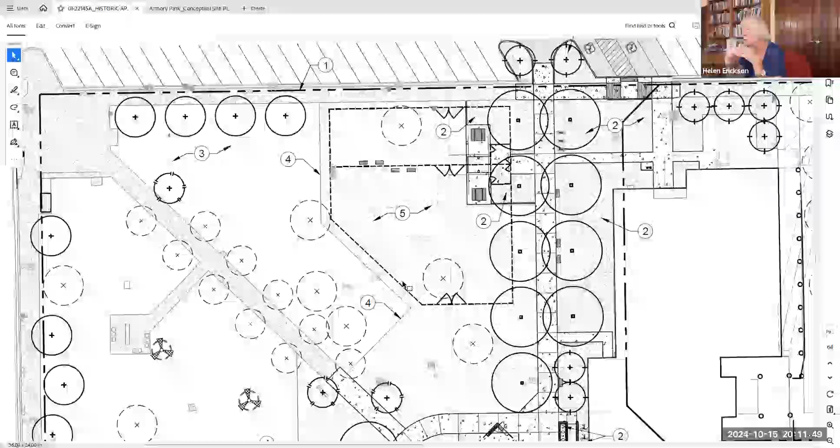I'm not sure our argument has to be whether there's a dog park or not. It's obviously a kind of privatization of public space, which we're overwhelmed with all the time. But if we are to have a dog park, because that's what the majority of people have decided we need, then I think we need to argue to protect the structure and function of a historic park. That's why this extension to the south is really bothersome.

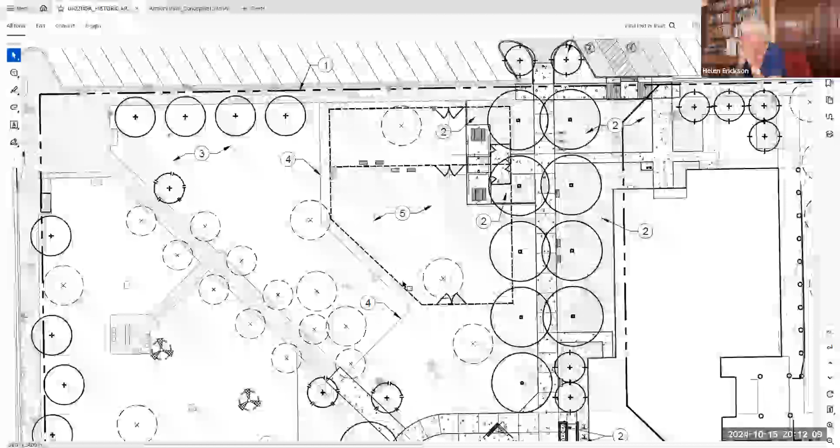So the dog park question, we're going to continue. Until it disappears. Okay, can I change the subject for a second?

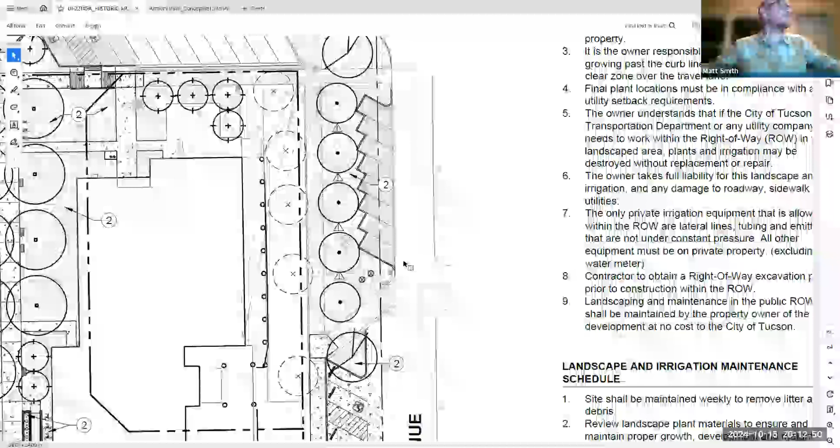Are there going to be the same number of parking spaces with your restriping, or do you get 5 to 8 more? With the new restriping we're losing 2, but gaining 8 with the new staff parking, so we're net gaining 6. With the access changes you're proposing, that seems reasonable for the scale of the park, in my mind. We're only losing those spaces to accommodate the new planting areas.

Okay, are we okay on the parking, folks? Yes. Are we okay on the demolition plan? Yes.

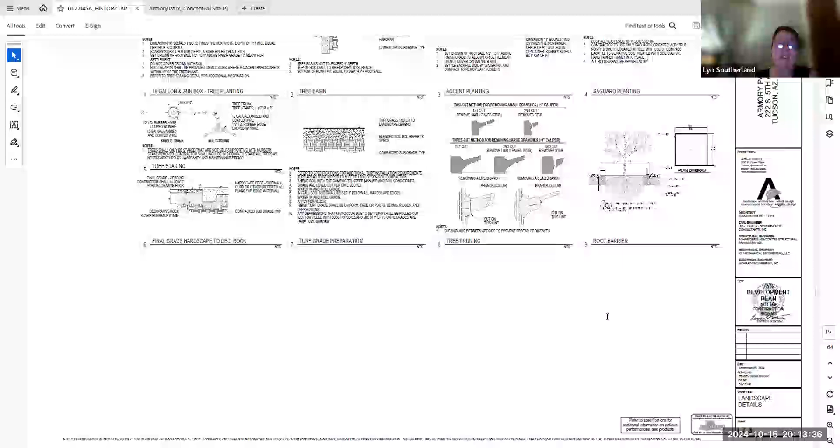I'm sorry, I'm hungry. I know. I feel like a circus man, like I've got a whip in my hand. It's just we've got to accomplish something, or we'll be here all night.

We can leave open items, but we've got to give them something concrete that they can move forward with, so that they can share the current state of the plans with other people, noting that very little of what we've seen tonight relates to the development package we were presented with.

Well, I think we have to come back to you anyway. If we're going to come back for the pavilion, don't we have to come back with everything, Matt? Or do you want to try to accomplish some level of approval tonight? I guess it depends on Michael's guidance—can we go to PRS or the landscape subcommittee with half approvals here, or are we better off waiting for everything?

No, as I said before, I don't think I'd be doing you justice to let you take partial things to PRS. PRS likes to get a full review, so you leave from here, go to PRS, and you're not coming back here—that's a better way for you to move forward. If you want to go back and forth between PRS and Armory Park, that's just a waste of time. We're doubling the number of reviews we have to do, frankly. And in between, you're talking about going to the historic landscape subcommittee—you may do that, and you may ask the board for a special meeting depending on when you think you can revise your drawings, rather than coming back to them. We just go to PRS with a full set of recommendations from Armory Park for everything you have. Armory Park plans review makes its one-time review or another recommendation, and you move forward from there. I think that's better for you.

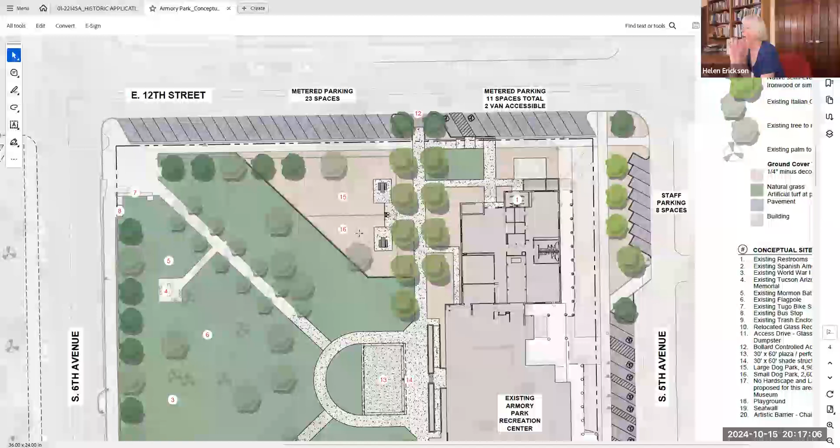That's its fundamental character. That's why your design for the stage is so good, because it maintains that geometry. If you're going to ask what is the overall most important defining characteristic of the space, it's the geometry. When you're inserting something that interrupts that overall symmetry and geometry, it's obviously an accommodation. You have to make accommodations sometimes, I understand that, but they should be as uninvasive as possible.

As far as the size of the stage, I would advise you to check with the city of Tucson what the standards were for Tucson Meet Yourself music stages, even the folk festival. That'll give you an idea how much space you actually need. But just by looking at that drawing, it's not going to be sufficient.

But Maurice, again, we're talking about the proportions of this park. And it may be that this is not the place to have a gigantic stage. I'm concerned about these proportions and the geometry.

Helen is right, because if you look at the park on Stone and Speedway, that particular park, the character-defining feature was a geometry that was being looked at. They went to West University and had a similar discussion you are having today. The geometry was the one that determined most of the placement of the things. And then as far as the dog park is concerned, it looks like these projects that go through the bond project process, there's always a dog park, which is a component of it. So I like the discussion you are having, but as to whether it is going to change or move, that there will be no dog park here, I'm not sure.

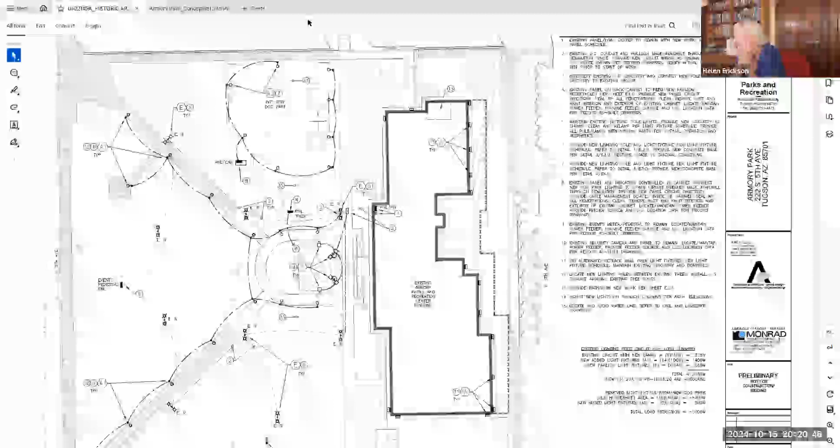Snugged as far out of the way as possible. We're all kind of doing the brainstorm thing, and I think this is a healthy exercise because this stuff's going to be built.

But at the same token, let's think about the dogs themselves. Like I was saying earlier, what does a dog do when he goes to a dog park? He goes running with the other dogs. If you put him in a little fenced-in area where you can only turn around, and that's about the size of it, it's not really going to be used much. Let's put it that way.

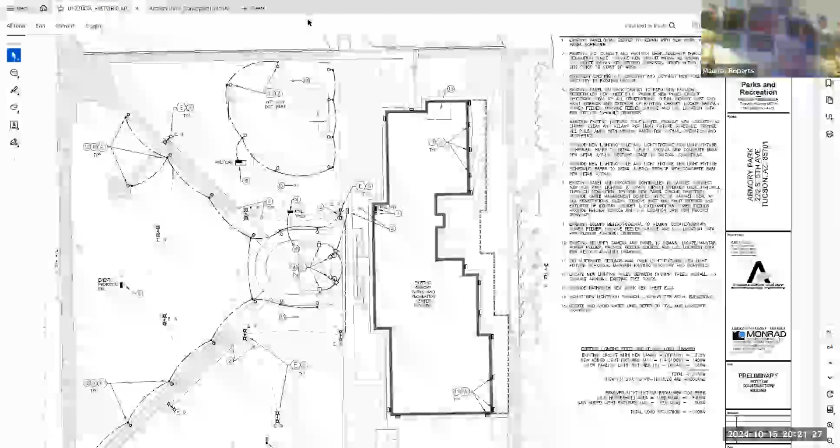Let's see the lights you're going to show us. I looked them up online, and I have a feeling the UFO sightings in Armory Park are going to go up if you place those in there, but they're kind of fun too, in a weird way.

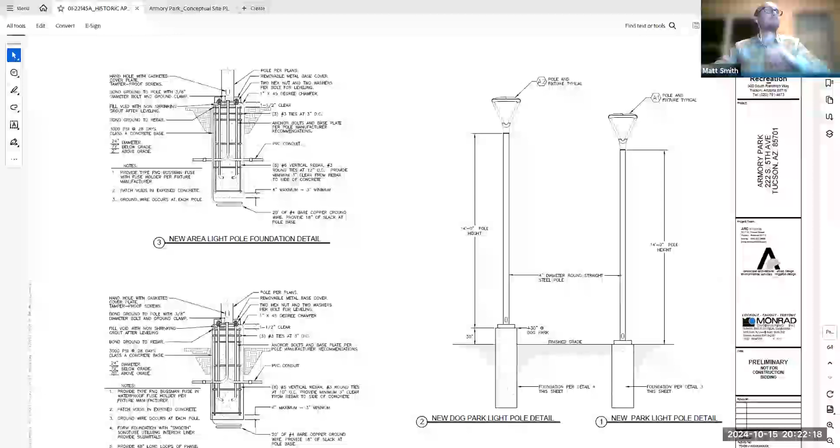I looked them up, but I wasn't able to do anything but a giant download that I couldn't split apart.

I've seen a lot of talk on the Armory Park listserv about dark skies and shielding lights and that sort of thing. Does that work into this? These are all dark sky compliant, correct?

Great, perfect, thank you. They appear to be downlights with kind of directional footprints.

Yeah, I believe it's about 2,500. And they're anodized. There's color choices.

Could they be a lighter, more muted shade than yet another black feature to compete with the historic lamps? Yeah, I believe we can do custom colors if needed on this, but I think there's architectural bronze and maybe even some gunmetal type, but we can look into that.

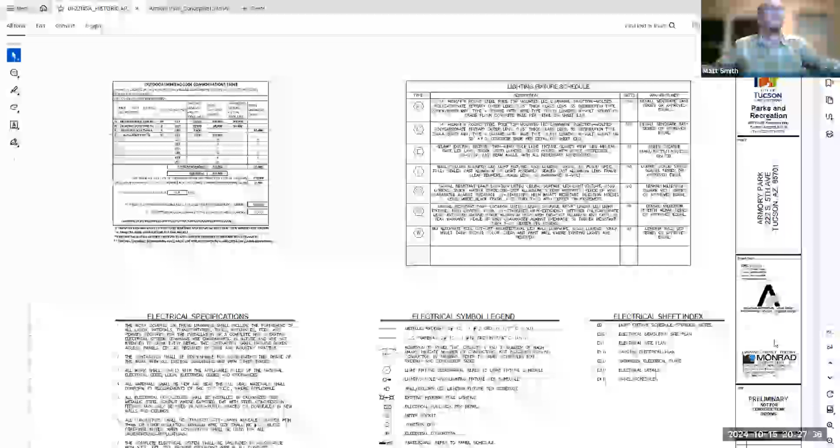Okay. So what I think you can do, based on what Helen just said, the historic landscape subcommittee is meeting on the 31st. You can contact Steve Brady, I think he's very good at putting that thing up, and go for that one.

The next plans review subcommittee is going to be November 14th, and we can see into if we can get you onto that agenda, so that before you go to plans review subcommittee, you've done all your review with Armory Park. I'm a little bit reluctant to piecemeal and take you to plans review, and have them recommend approval for this, but this is still pending.

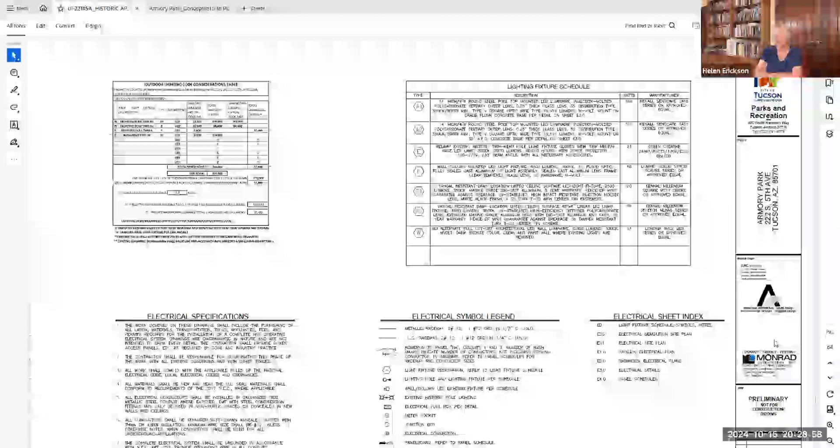I don't like to do that because it's just a waste of time. The Historic Landscape Subcommittee meeting is on the 31st at 10 a.m. They might also be able to help you brainstorm, because they've got expertise. Yeah, that is an in-person meeting.

Sounds good. The board can decide when they want to hold their special meeting after your historic landscape subcommittee, which is probably going to be sometime before the 14th of November, and we can try to get you onto the PRS agenda on that 14th, which is already a big agenda anyway.

We are trying to be helpful. I appreciate it, we appreciate it. And I'm glad you are developing them, because everything you've shown looks better tonight than what we got. It's just not fully baked, right? No, but I'm glad we came, because now I feel much more confident finishing what we're doing and coming back. So I really do appreciate this. This has been hugely helpful for us.

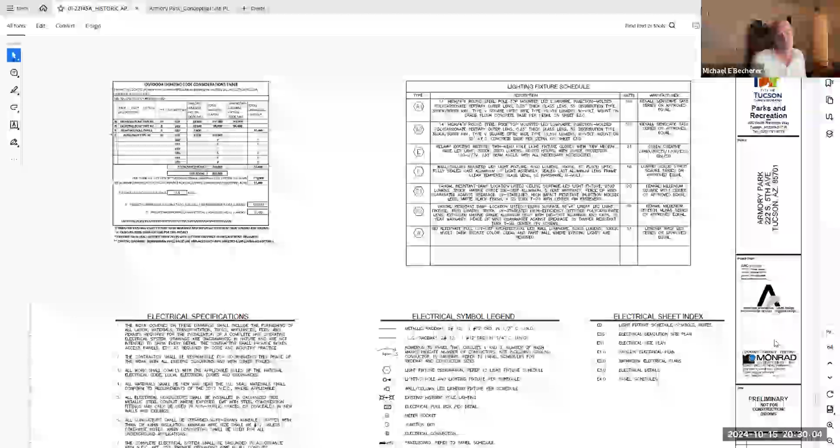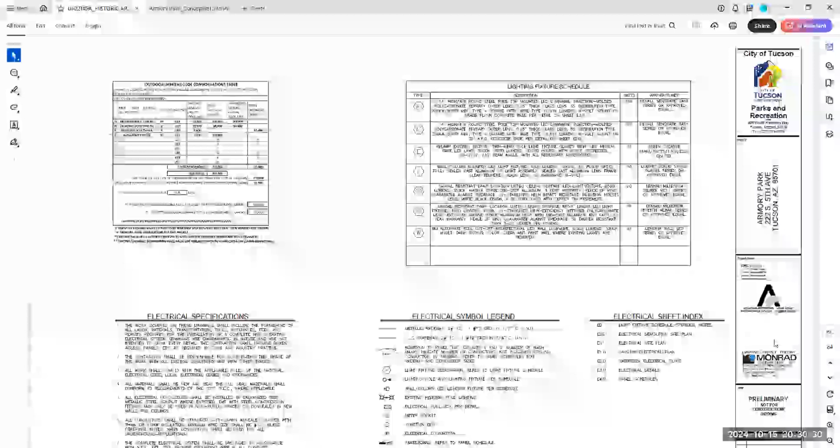I will say that because we're going to continue it, I am not writing a 27-page LAR. Please listen to the recording over and over again. I will do a summary, just a one page or something. Particularly the motion is the most important thing here anyway. I think they are taking notes, and the recording will be available. You can listen to it and get all what we discussed, please.

So who wants to make the motion to continue? I'll make the motion to continue. I second the motion. No, you cannot second without making the motion, man. The motion is not yet made.

What do I need to do? You have to wait. When he makes the motion, then you can second the motion, because you're not seconding anything yet. Okay, in the matter at hand today, I am making a motion to continue at a further date, with a special session if necessary, as soon as possible.

Great. Any more discussion? Do you want to say in your motion the things that you want them to come back with, or do you believe that Matt has taken note of them and that should be fine? They're gonna listen to this tomorrow, it'll be fine. Basically it's everything, right? A lot of the things on the list are fine. You're gonna have to do what you're gonna have to do with the bathrooms. The parking looks like it's all right. The tree replacement's there. I hope you consider adding a tree that we might be able to name or do something with the ward office. The lights we'd like to see, and furniture we'd like to see. We just encourage you to perhaps connect the stage area to the walkways instead of having to walk on the grass. And I like the colors, not necessarily oranges.